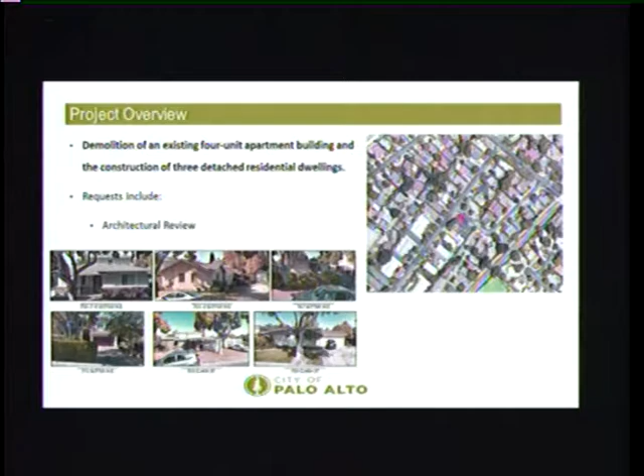There's an existing 4-unit apartment building on the site there that would be demolished, and that was constructed in 1954. It's not deemed to be historic. And as mentioned, the proposal is to construct 3 detached dwelling units. It'll just maintain the one parcel. They're not splitting the parcel up, but I think the intention is to have a condominium map placed on the property in the future. The project was before the board this past February.

There were a number of items that the board wanted to see looked at and revised, and those had to do with the floor to ceiling on the second floor being too tall. I think the preference was to have an 8-foot height. Also to provide good quality rendering from the street corner. Homes should be custom fit to the lot with high quality design materials. At the previous meeting, there was just one floor plan for each, the same floor plan used throughout the project. Maybe one was reversed with different architectural styles.

There was a common open space along Sutter, and the revision proposed was to reduce that fence. The board thought that the porches were too shallow. The proposal also aimed to take advantage of some of these open space areas more, so that would change the site plan around a little bit, providing a better relationship with that streetscape. The site has streetscape along Sutter and Clara.

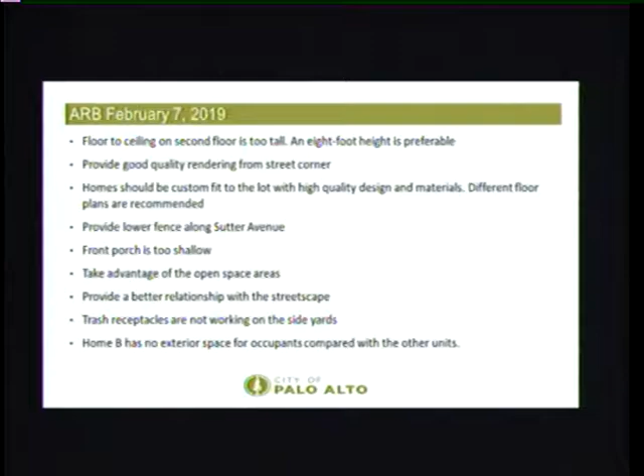Also, the property does have a utility easement on the rear of the property, which is opposite of the Sutter, so there are some constraints there. The board also thought that the trash receptacles on the side yards were not really working very well, in part because there were fences in between the buildings, and Home B really didn't have much exterior space.

So just in summary, the project is one lot for a future condominium subdivision, 3 two-story detached dwellings, totaling 5,000 square feet, which is pretty much maxing out the floor area ratio. There are 3 different floor plans this time with similar architectural styles. The material board is on the dais near Board Member Hirsch.

The private open space areas are in the rear of the buildings. There's a common area along Sutter. The project is retaining the street trees, the mature redwood trees, as well as the maple trees along Clara.

In response to the revisions I mentioned in the previous slide, the second floor ceiling height is now at 8 feet. The front porch dimension on 2 of the units is increased by a foot. One of them still remains at 4 feet.

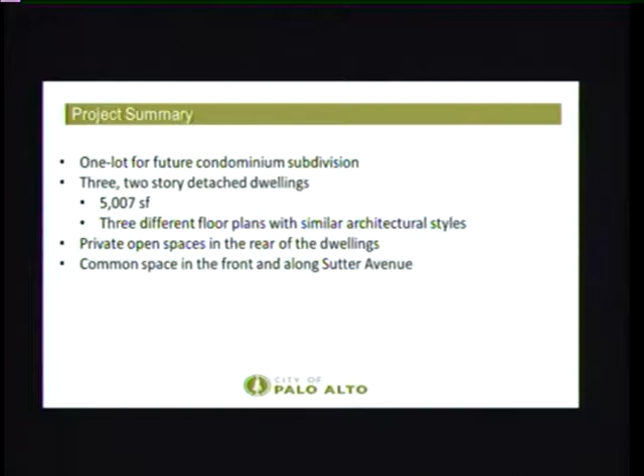The fences in between the units were removed. However, that created another privacy issue. The applicants do have an alternative that they want to present. What we would recommend is putting those fences back, moving the condenser units on the side yard to the rear, as well as the trash and any bicycle lockers.

There was a balcony added to the rear of Home C, which actually provides some variety and was a good amenity, but there's another privacy issue there, so we recommended they add another tree. The applicant has responded and will have an alternative plan to show you.

The other issue is that there are windows adjacent to the stairwells that are actually kind of big, and we're looking to see if there are any comments on privacy issues from the board on that.

Regarding the zoning, there is a reduction of 1 dwelling unit overall, which is a bit of a concern, but there's nothing in the code that would preclude them from doing that. The project is otherwise considered a multifamily unit project based on the amount of units. 3 is the threshold. The project is consistent with the development standards.

They would have to pay an impact fee of $64,000. We have to amend our condition of approval to include that, so make that part of the motion when you're recommending.

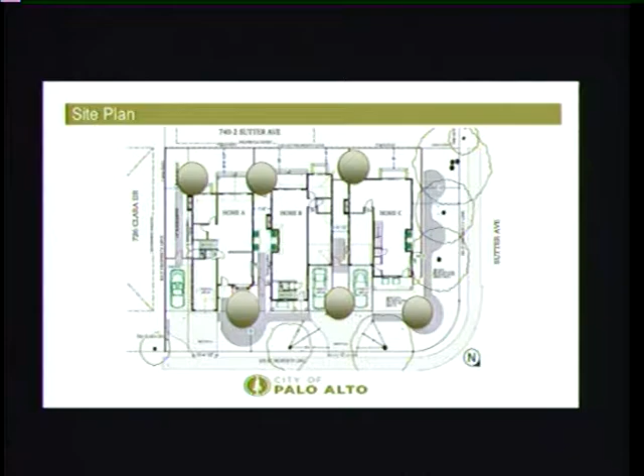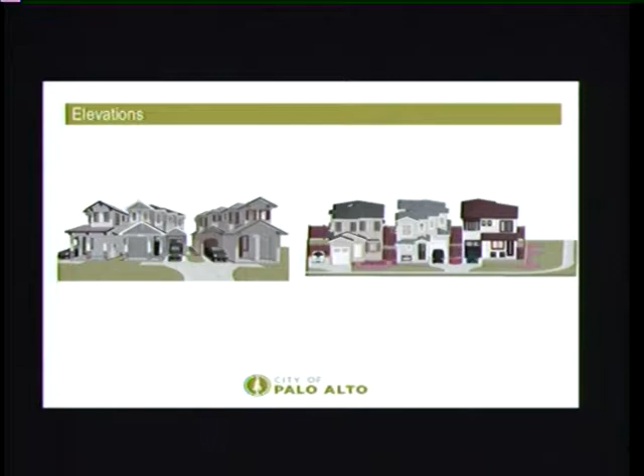And then these are the renderings. The one on the left is the older rendering from February, and the one on the right is the newer one. You see some subtle differences there. The applicant will describe more of those.

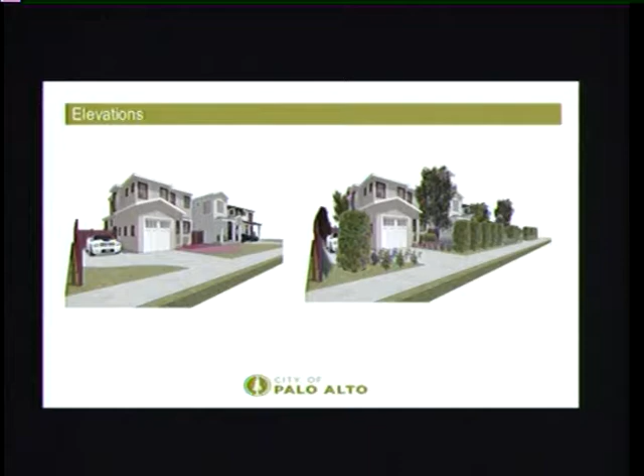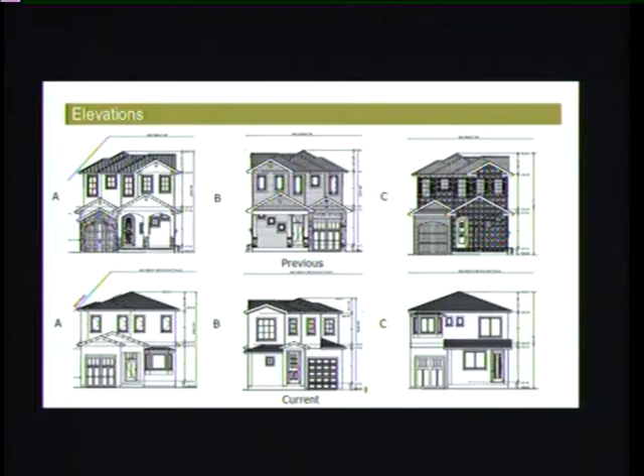Here's some other elevations from the current design that show no landscaping, then with landscaping. And some other comparisons from the past and present here. The applicant will go more through these, but we believe this is an improvement from what was done in the past.

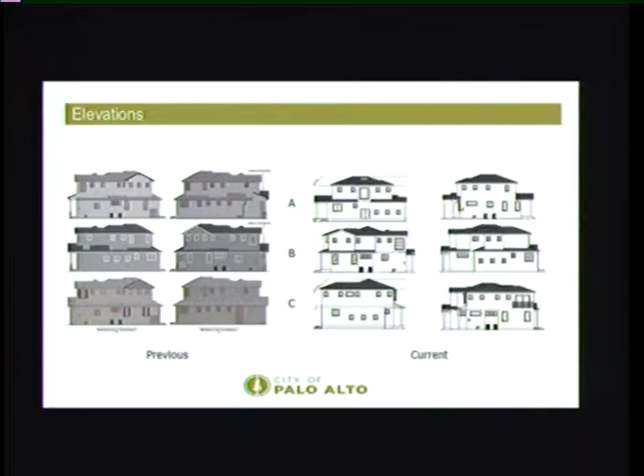And then you can see here on the right those large windows on the second floor. Those are the ones next to the stairwell that we wanted some direction on.

Regarding the environmental determination, the project is considered an infill development surrounded by urban uses, and the project does not create any significant impacts pursuant to CEQA, so we believe it's categorically exempt.

In conclusion, the project is consistent with the comprehensive plan and the zoning ordinance with the suggested modifications, and we recommend approval of the project to the director based on the findings and subject to the conditions, also modifying that one condition regarding the affordable housing fee. So that concludes my presentation. I'd be happy to answer any questions you may have.

Thank you. Thank you, David. We'll have, Sheldon, we'll have questions in a second.

I'd like to first ask my colleagues if we have any disclosures to make. I should have done that at the beginning. Rather than ask specifically if any of us have been to the site, I'll just remind everyone that a site visit is something we need to disclose.

So Alex, any disclosures? I visited the site this morning. Osma? I have nothing to disclose. David? Previous time only. Okay, I'd like to disclose I visited the site on Saturday, and I spent quite a bit of time talking with two of the tenants upstairs, the neighbor across the street, and one other neighbor walking around. I didn't learn anything that's not already in the staff report.

Okay, questions of staff, anybody?

Sheldon, could you explain for us the impact fee, what that's for?

Yeah, that is for when you're going down in the units, there's a certain percentage that gets equated into the formula. There's a formula that has to do with the average size of the units and a certain dollar amount that gets plugged in, and therefore you get that number. So it's a fee the applicant pays to the city for the privilege of reducing the number of housing units.

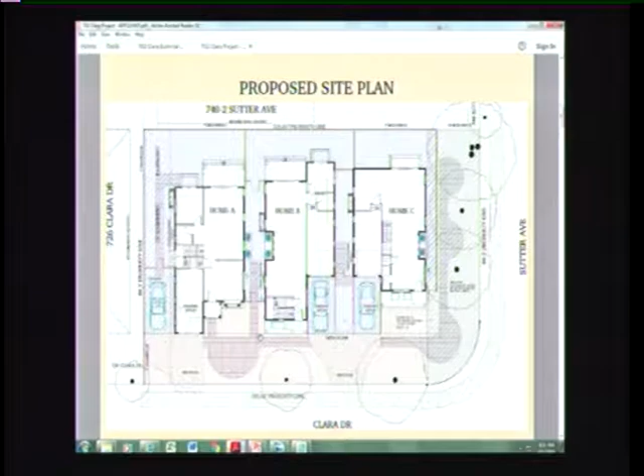The color is black. In the front, we have red, which is facing Clara, and that area is more of an open area used for all 3 homes. They kind of have their own spaces in front, and then on the rear, if you see the dash, which is in blue, those are all considered private.

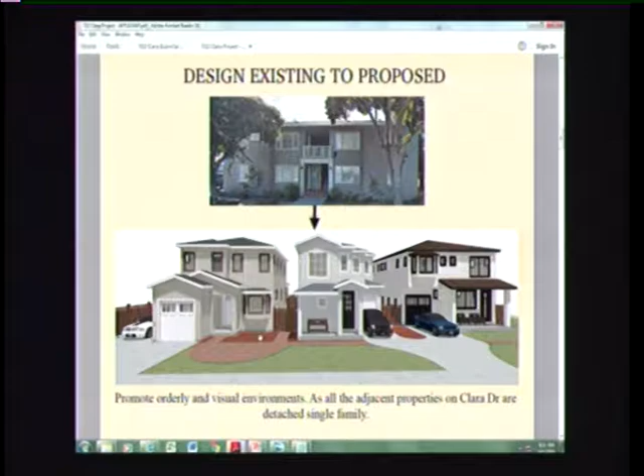So as you can see here, we do have the existing, which is now the apartment complex, and what we'd be proposing is reducing units. We have a 4-unit complex, and we'll be reducing it to 3. So that would be kind of one point as well.

Again, this is just kind of going over again what we had before and what we're proposing now. One of the comments was that the designs of the previous homes were a little bit too busy for the neighborhood, and so we were asked to simplify them.

So we looked around the neighborhood to see what is existing, and we added it to some of the homes in our proposal. For example, the bay windows, we did see some of the homes had that. We did stick with stucco, as in the previous designs we had some shingles, a lot of brick, tile.

So we just simplified it. We proposed that all 3 homes stay stucco, and we removed the brick, the tile, the columns, as well as we kept all proposed shingles, and we changed all the colors so that they look different, as well as the floor plan that we're proposing. As far as the colors, we kind of kept them pretty simple.

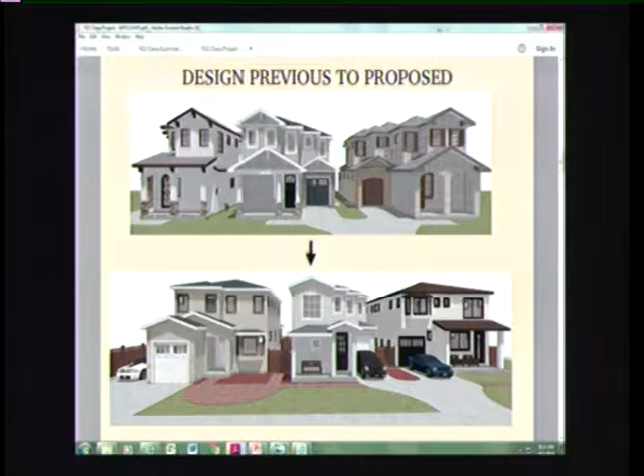Another comment was that the roof line or the roof planes were way too busy in the previous design, so we did simplify them as much as we could to accommodate the new floor plans. This is kind of just a quick look at the surrounding neighborhood. You do have them in your packets, with A2 and A3. So again, we just went around the neighborhood, took what we saw and simplified them to our proposal.

As far as privacy, for the second floor, we did reduce them to 8 feet, as well as the first floor, which is 8. Previously we did have 9 on the second floor, so this also reduces the height of the overall homes, so that they're not sticking out from the neighborhood.

For the window design, we have high sills, mostly on the second floor, so as not to look into the neighboring homes A, B, and C looking into each other's areas. We do have those windows as obscure glass. The landscape also has additional trees while keeping the existing trees, to block the view from the areas that homes A, B, and C would otherwise be looking into had there not been any of those.

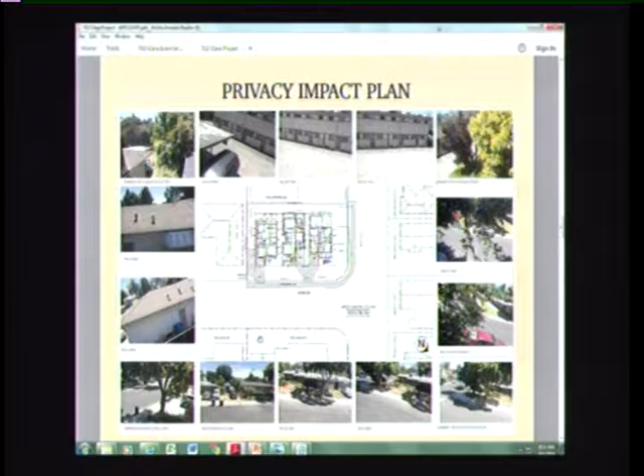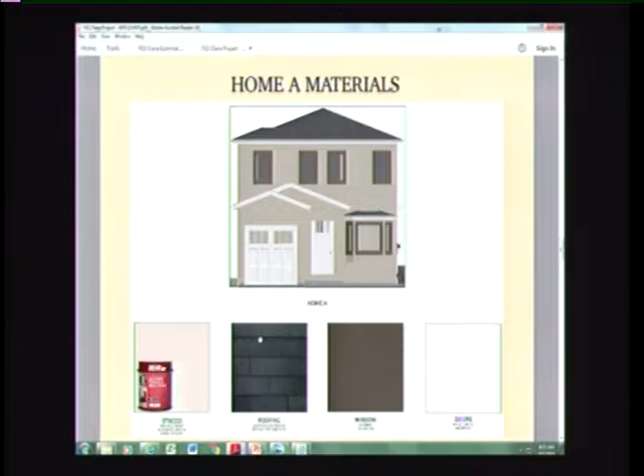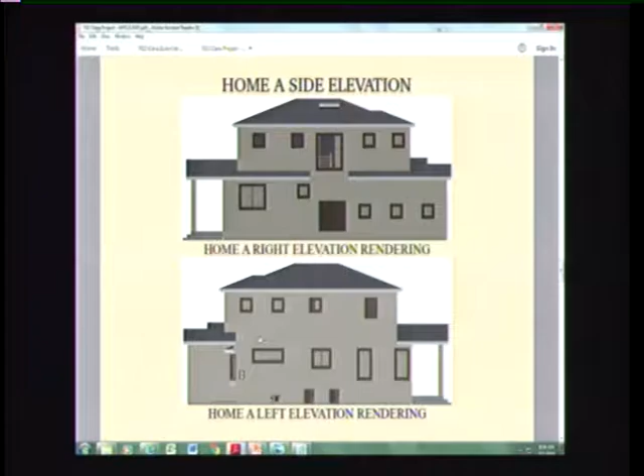Actually, let me go back to that. If you can see on the bottom, we do have some high sills as well in some areas. And the dark area is just a double door for furnaces.

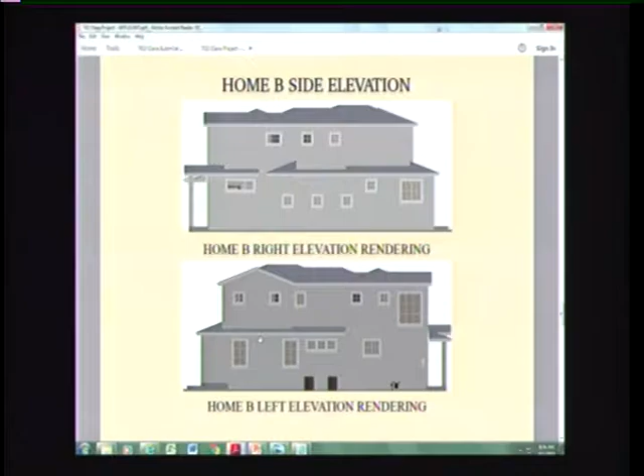And this is- Excuse me, you're about a minute over your limit. Could you finish it up, please? Sure, oh yes.

So this is just some of the planning comments that were given to us about putting a fence in the center and having an issue with the balcony in the rear for Home C.

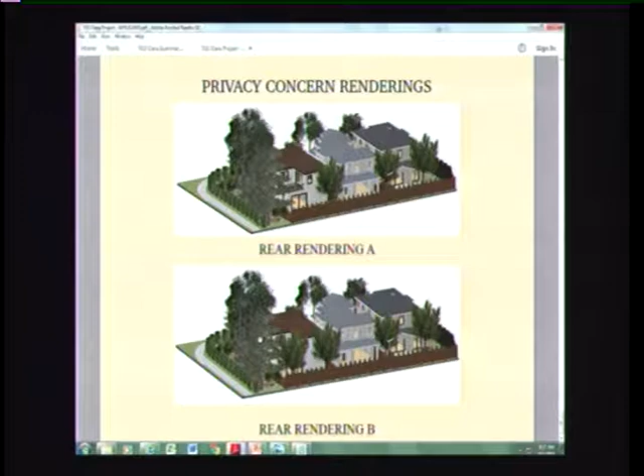So this is just an alternate plan to place the fences back in and moving some of the AC units and the trash area items in the bicycle areas. So this is just another option if it works. And this is just a rendering to show the balcony being blocked by an additional tree. And that's all I have for you.

Thank you. Thank you very much. Any questions of the applicant? Osma? Yeah, I had a couple questions.

In your material boards, you have light fixtures associated with each of the buildings. However, in the elevations, it's not really clear how many or where they are. Could you clarify where these light fixtures occur? The light fixtures? I don't have them in the renderings, but they are going to be in the rear sliding door. There'll be one and one on each side. Garage will have one and one.

Photo, I forget the word - they turn off by light in the evening, and then some on the columns in the front. So they'll be visible from Clara and from Sutter.

And it's still kind of unclear how many you're using, or have you already placed all of them? No, we already placed them. Yes, they should be in the electrical plan in your packet as well. Okay, the location at least.

And then of the windows that we've been seeing in these elevations, are they all operable? Can they all open, or are they fixed? Let me verify that - I believe the ones on the sides, the smaller ones, are fixed, and the operable ones are towards the rear. So the small square ones are all fixed? Yes.

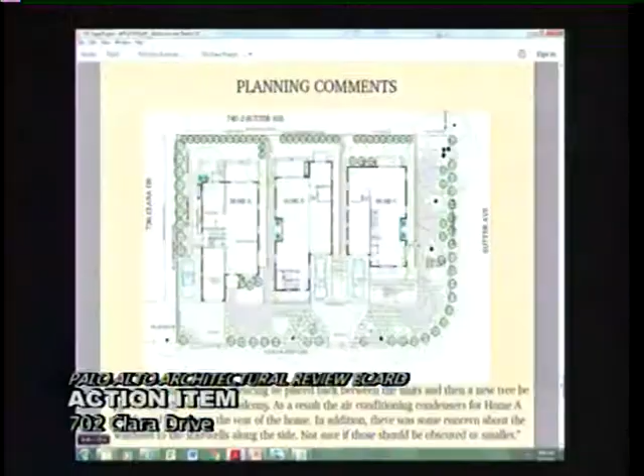There's screening from the street all along Sutter and Clara, where there's no driveway or existing street tree, provided by native shrubs, the manzanitas. The landscape is still predominantly native and drought tolerant, with a variety of shrubs and grasses and subshrubs such as irises and California fuchsia. Additionally, there's screening along the fences on the left side and along the rear of the properties with larger hedging shrubs, and each unit has a small no-mow lawn area in the backyard.

And then along the driveways and entrances, there are—well, first I should say there are six new trees shown. One at the front of each house, a smaller redbud tree, and in the rear, arbutus trees, one for each unit, with more ornamental perennial plantings underneath them.

Thank you. Let me follow up on the landscaping question. I'm looking at a rendering from the corner of Clara and Sutter. I'd like to know if that landscaping is accurate to what you've designed.

I would say in terms of the placement of plants, it's fairly accurate, but visually not very accurate. I think the shrubs shown there look columnar, whereas my intention with the manzanitas would be that they would be more naturalistic and hedge-like.

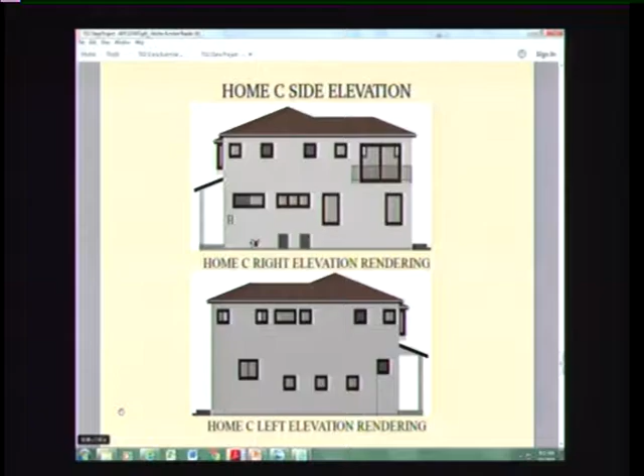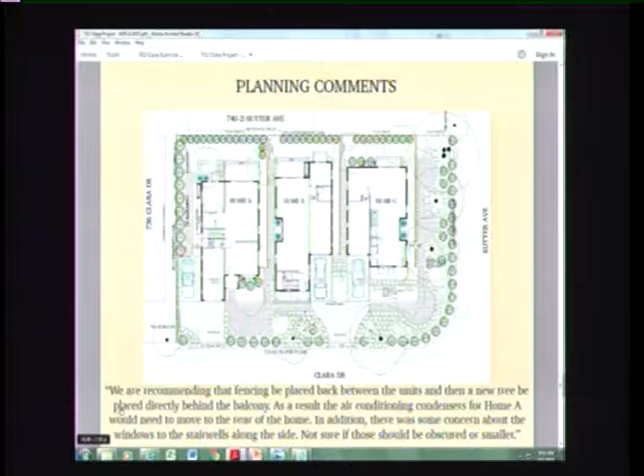As far as that, if we go back to the site, having them in the center, as we mentioned, is more maintenance. It was also a concern in the last ARB that it's way too tight for someone to walk through, and that's why we removed them. Once we removed them, we did feel like it was a larger space for the homes to be separated, and they almost feel like they have their own privacy instead of just having a fence in the center.

But other than that, yes, our current proposed without fencing, I believe we would prefer. So I'm unclear what your preference is — these are fences between your clients or tenants, and it's their utility. Would you prefer to have the fences or not have the fences? Not have the fences.

Okay, any other questions? So the plan that we're looking at on the screen is not the same plan in our drawings, right? Right. I just want to clarify what we're talking about here, because in our plan I see something older. Are we talking about a fence that's going all the way through between each building — is that the proposal right now? Or is the proposal not to have the fence and just have a change in paving between?

So I'll take this one, Gil. Actually, in your packet, there are conditions of approval that would require them to put the fences in, so this is in response to that. They're getting you some early views of what that would look like.

Sorry, can you repeat that? So in the packet, we have conditions of approval to address these issues we brought up today regarding privacy, to include the fence down the middle of these units. A lot of times you wouldn't be able to see a drawing of that at the meeting, but they took the time to do that to show you today.

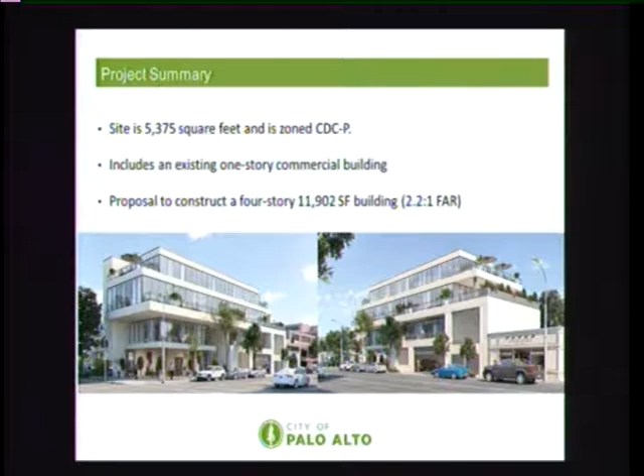There's a mesh kind of railing system used throughout the project, as well as the gate for the entry into the garage. The project includes a puzzle lift system that's partially below ground and partially above ground. You would enter the garage, and have some surface spaces on the left side that include your accessible spaces and charging spaces. Then you turn to the right, and that's where the machine is - you go in there, and once you get out of the car, the machine takes you either below ground or above ground. There's a cross-section that shows that on the slide here.

So the project will need to address height, and it will need to address the open space arrangement, as I mentioned. With respect to parking, the number of parking spaces is accurate. However, retail spaces can't use the puzzle lift without the director of planning considering this could be a valet parking operation, or the applicant could request a reduction in parking spaces through a transportation demand management program, which is a requirement anyway. So there are a couple of options they could do to address that.

And as I mentioned, floor area is over. The interesting thing about this zoning district is covered parking for non-residential is actually included in FAR. In other parts of the city it's not, but in this district it is, so that was kind of a penalty here for them, and they have to address that.

We are seeking some comments from the board regarding the scale and mass. This project would be probably one of the larger ones that is there now. And before I started my presentation, I did mention that there's that kind of older building that's adjacent to the project. So is there justification to have a 50-foot building right next to that? And then segue into the design in a neighborhood context.

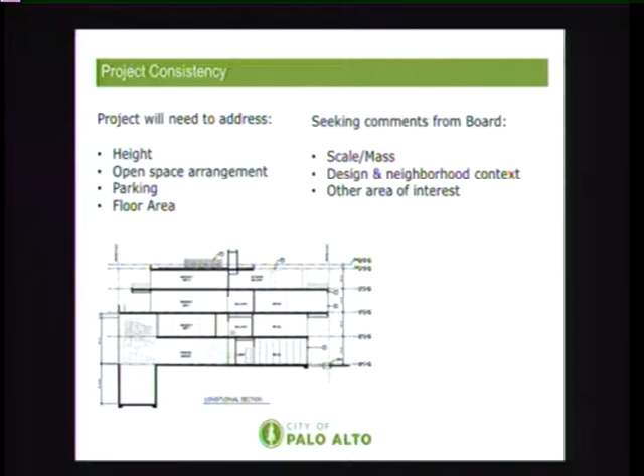Is this appropriately designed? There's kind of a mixture of traditional architecture, some newer building along Cowper. It's a 4-story building, but that one has a lot more variety and setback, but it's also not next to kind of a shorter building. And there's other areas of interest by the board that may come up regarding their proposal.

So with that, I recommend that the board review and provide comments. No formal action is requested at this time. That concludes my presentation. Thank you.

Thank you, Sheldon. Any questions of staff? David? Yes, Sheldon, so you mentioned the parking issue. I'm not quite clear why we would go that route rather than suggest that they take care of all the parking in a cellar area, which is not recommended here. Could you explain?

That is also an option. I think I did speak with the applicant. They would be exploring a kind of basement. The issue here is not a whole lot of space to have a ramp, so they probably would have to inquire about doing an elevator to get down a level. So that's an option for them to look at.

You're saying it couldn't be ramped? I think there could be a challenge in doing that given the dimensions and the size of the property. Did they ever create a scheme showing you that it's not possible? Not this time, but we would recommend that they do that. I think we should explore that, absolutely.

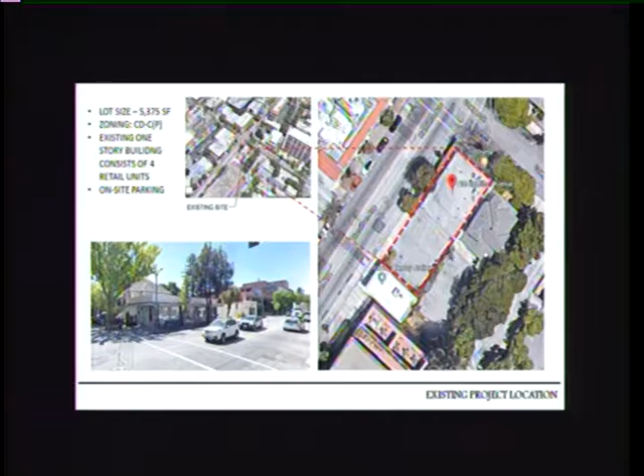There's no existing trees on the site. There are 5 beautiful street trees that we'd love to save and keep. In terms of the setbacks and whatnot, there's actually no commercial setbacks, front, side, or rear, but there is a setback for the residential. Opposite of Cowper, I think there's a 10-foot setback, so that's why you see some of our plans stepping back here.

I think Sheldon went over the stats of this. Let's see. The property, as you know, is 5,375 square feet. Total FAR could be 10,750 square feet. I think we provided 22 parking stalls, and as Sheldon reminded, we're slightly over the FAR, and I'll discuss the parking shortly.

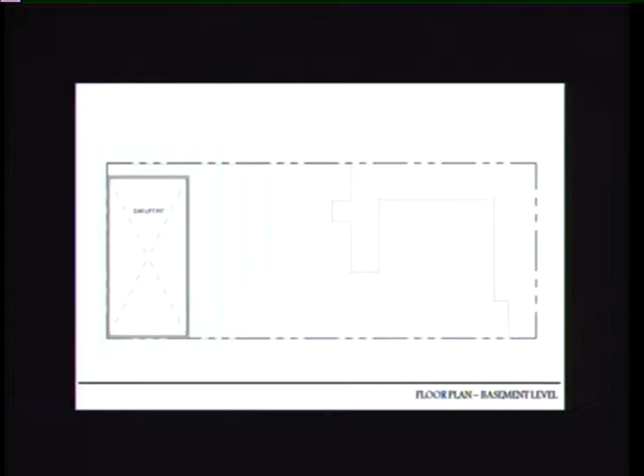We're envisioning some sort of retail, like an art gallery, since the weather here is super nice. There's probably 2 days out of the year where you need AC, and the rest of the days you can leave it completely open, and people can meander from the street through the landscape areas into the retail space. For this landscape area we envisioned pavers and maybe grass in between, to make it more inviting, but we'll work with the landscape architect to maybe add lavender, so that when you walk by it brushes against you and the smell wafts into your nose.

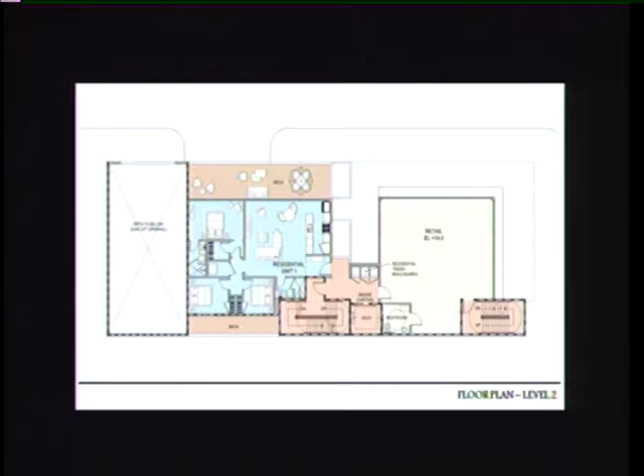Up on the 2nd level we have the office space, and some residential off to the left-hand side. That residential is going to be great because they have a huge balcony with a nice planter. I think it's going to be a pretty decent unit. These units aren't big, 3 bedrooms, 2 baths, roughly 1,000 square feet. Usually the other units we design are a lot bigger, but this is great - small and compact.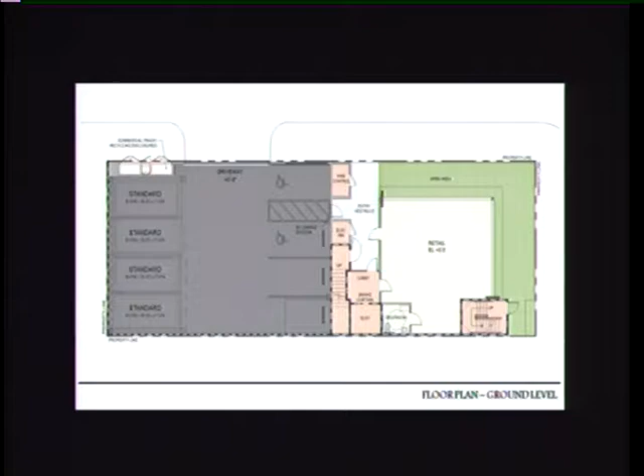On the 3rd level there's a balcony, and the building is stepped back. Then we step it back again, so it's not just a wall of windows on the street.

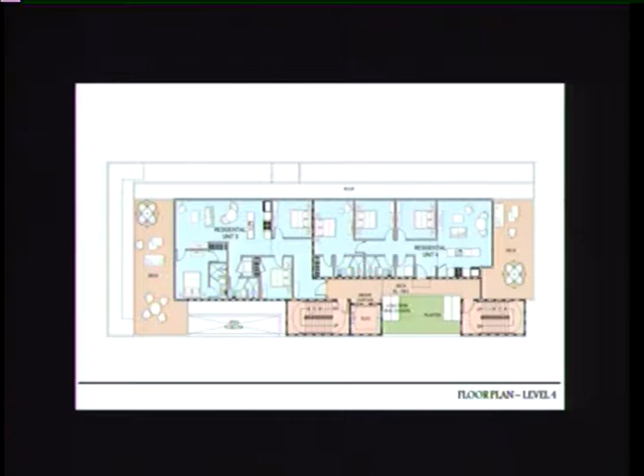When we read the building codes, I think you're supposed to provide a stairs, but we're going to see if we can get away with a ship's ladder or something like that.

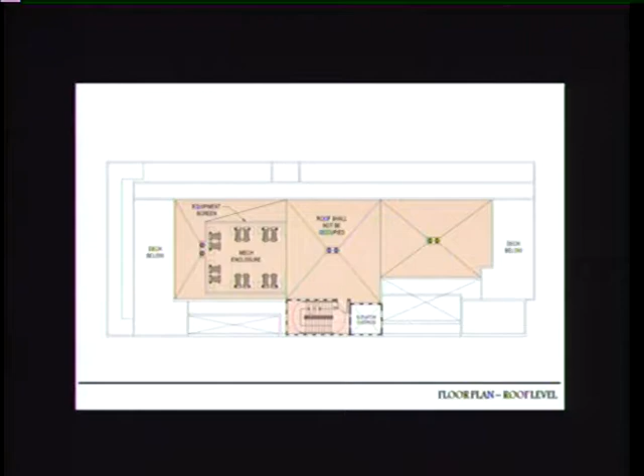And then the AC units, what we're trying to do is to shield it visually and for noise and whatnot from all the neighbors. We're going to put some screens, maybe a 6-foot screen or something like that. I think it would be beneficial for the community if we do that. So there's other buildings around there, maybe a little bit taller, they can look down, and we don't want them to see all the AC equipment there.

One of the design inspirations we had for this property is the Wells Fargo building. It's not clearly shown here, but they have a lot of horizontals coming on, so we wanted to pick that up. We didn't want the design to be so foreign to the neighborhood. We wanted to pick up some cues from the neighborhood, but extend some of those horizontals onto our building.

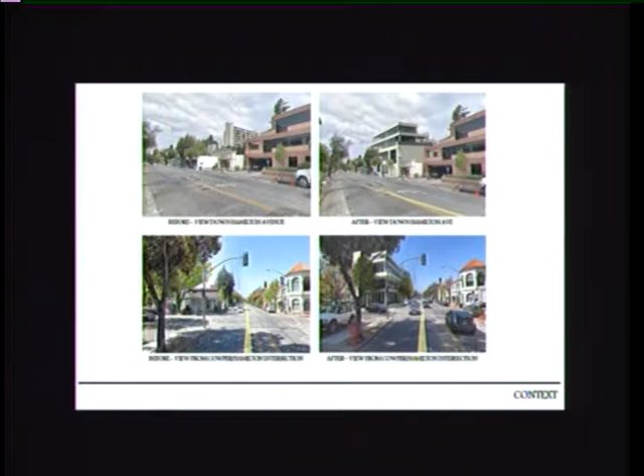Initially, the applicant wanted the building color to be more of a gray tone, but when we worked with staff and Sheldon, they said no, it's too dark. So we changed it to a more neutral color that is much better suited to the neighborhood.

Here's another shot, I think this is from Cowper looking north there. It is quite, the stairwell is dominant on that. We will try to address some of the blankness of that south wall there.

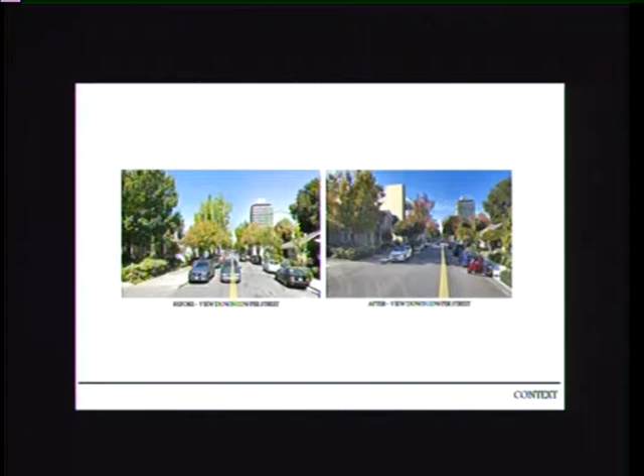One of the things we had in mind was that it's pretty difficult because on the south wall, it's right on the property line. It needs to be a 2-hour wall. So we'll talk to our code consultant to see if we can put any fenestrations or wire glass. I don't know if that's possible, but we'll explore that option. Or maybe put a mural up on there just to make it look a lot better from the Cowper perspective.

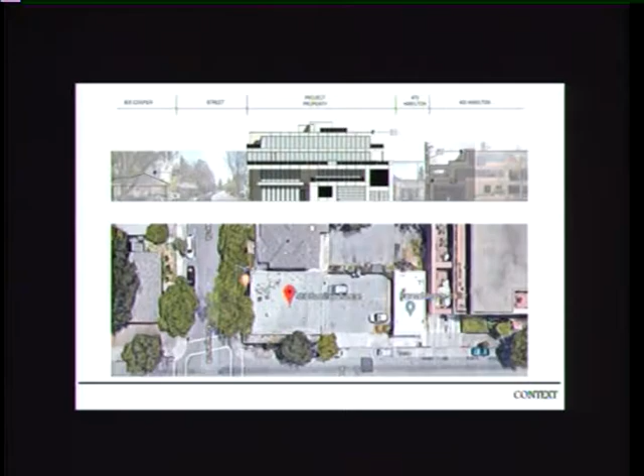So this is the site context with the building there. And this is, I believe, from Cowper. And this shows you how the building steps back incrementally from the street. And this is the lift system we're proposing, 2 down, 3 up.

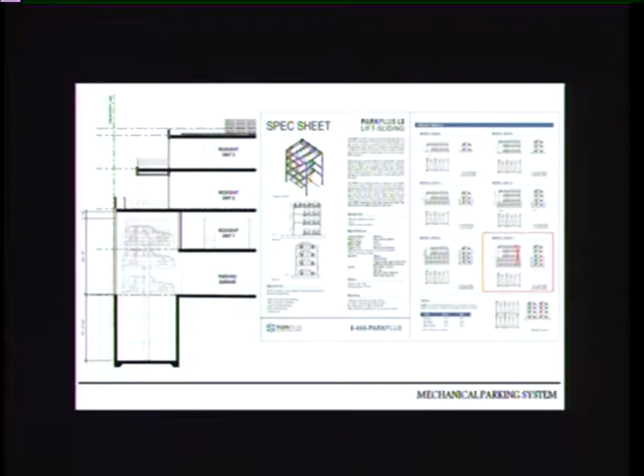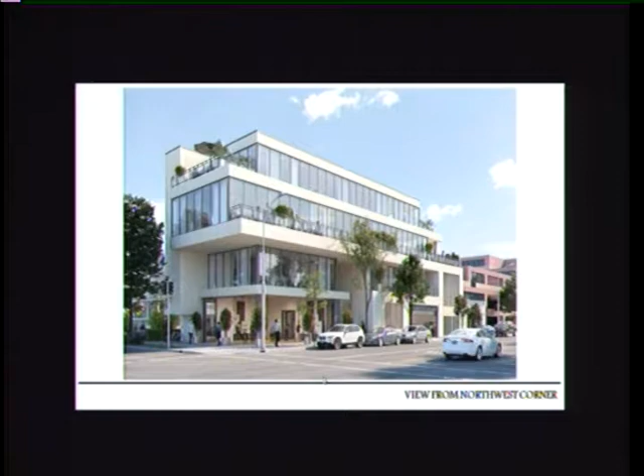And this here, you can see how it steps back from the street here, especially the corner here, how open it feels and whatnot. So it steps back, it gives a little bit of shade, a little bit more inviting, and then you can see the horizontals almost extending towards the Wells Fargo building and whatnot.

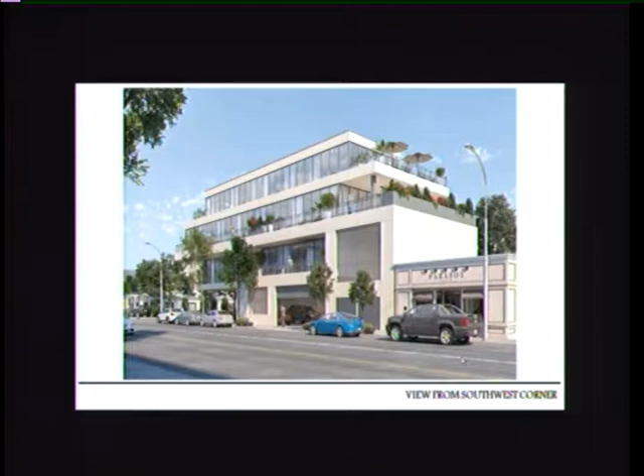And this is looking east here. This is the parking entrance here, and that's a retail. That's some more retail and some office up there.

And then see how it's just wedding cakes down here. We'd love to wedding cake it even more. We're looking at that. But this concludes my presentation.